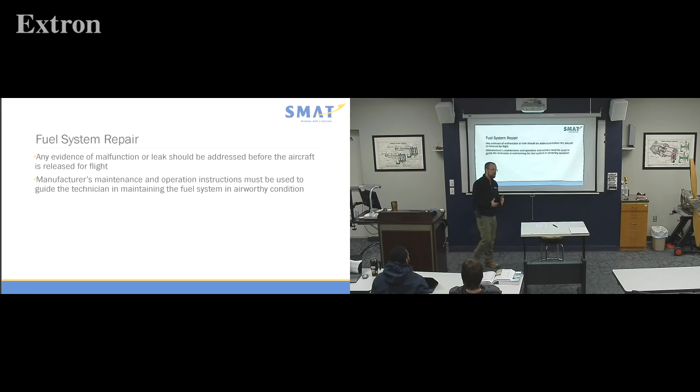All right, fuel system repair. Any evidence of malfunction or leak should be addressed before the aircraft is released for flight. There are some stipulations, and this is where the FAA asks several very ambiguous questions, so we'll look at those. Manufacturer's maintenance and operations instructions must be used to guide the technician in maintaining the fuel system in an airworthy condition. What do you do if you don't have a maintenance reference on the old 40s and 50s models for a fuel cap? What happens if there's nothing in AC 43?

A lot of times, Piper especially assumed that you already knew all these aircraft. And as I told you originally, how long were aircraft designed to last? 10 to 15 years. Well, congratulations, you've got a 75-year-old Apache out there sitting in our hangar. I mean, seriously. So now we've got to figure out, well, what does a fuel cap do? Well, it vents to the atmosphere. Does it work? There's not really a basic inspection method except for visual inspection. And sure, you could put a light amount of pressure in it to make sure that air is blowing through one side of it.

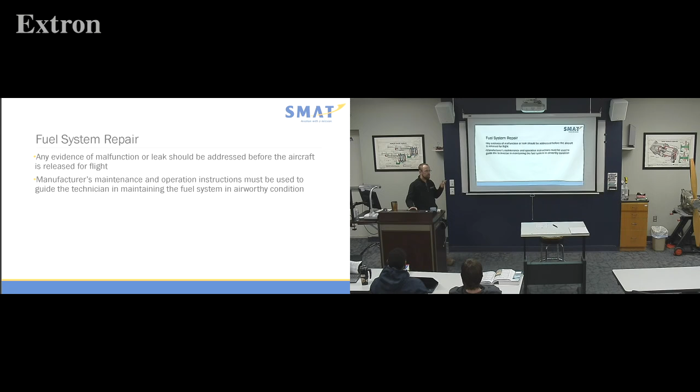Troubleshooting knowledge of the fuel system looks a lot like a schematic, but you understand what the fuel system is doing. If you were to look at this, it's kind of overwhelming a little bit. Where would you start with a system like this if you were looking at the big picture? Spider. Okay, so spiders, where are spiders typically going to be located? Well, they are located on top of the engine. Thankfully that is the standard. For both Continental and Lycoming, they're both on top of the engine.

What else do you see in this picture that seems familiar? Okay, you have fuel tanks. You have a selector, two selectors actually. Yep. Anything else that might seem big picture-ish? Okay, where's the gascolator?

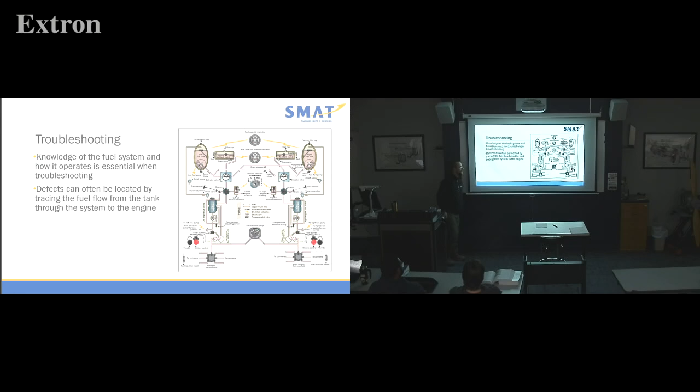I guess they're calling that. Nope, right here, strainer. Right here. Okay, there's a vapor separator on a Continental. What's the purpose of a vapor separator? Good job. For what reason? Prevent vapor lock. So they will send vapor back. Typically, they'll send it right back to the strainer, or sometimes they'll send it back to the top side of the pump. Okay, a vapor release, or back to the tank. Okay? Because vapor is flammable. All right?

So check connection point of fuel lines. So if fuel is continually leaking, what would we see? Slight blue residue. If it is a very mild leak, what color is it? Say what? Clear. It'll turn actually a slight greenish tint if it's a very small leak because it's having time to dry. Okay? If it's blue, it's typically a running seep or running leak where it's leaking just enough to keep it fresh and blue. But if it's a very mild leak, it's actually going to be a slight green residue because it has time to dry.

And fuel leaks, that's what I was saying, fuel leaks often produce a mark or a stain. Odors may point to the source of a leak. Zach, what does it smell like? Yesterday you found a leak. What does it smell like? Jet fuel. Okay? So point to it. If you open a panel and it smells like fuel, especially Piper, if you open the floor panel at the pilot's feet and you smell something, right beside the pilot is a fuel selector, notorious for leaking. Okay? Don't just dismiss it. Well, sure, it smelled like fuel, it's probably because of the fuel selector. No, if it smells like fuel, it's probably not sealed. Okay?

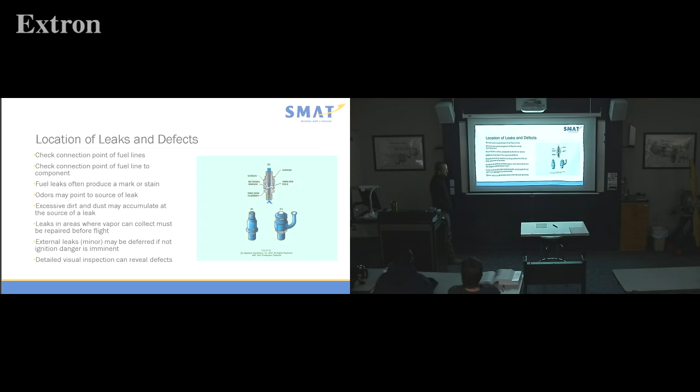Yeah, it makes everyone a little scared, especially 2,700 RPMs with 24 inches of boost. It'll kick it. It's pretty loud.

All right. So use the fuel system schematic to troubleshoot, just as you would electrical troubleshooting. To check if the fuel valve leaks internally, turn off the fuel valve. And then do what? Pull the gascolator bowl release, that little springy thing. And then if you still get fuel flowing to the gascolator, what does that mean about your fuel selector? It's not working. There's an internal leak inside of it.

And at that point, John, what would you do? You said it yesterday. Say it again today. You take the fuel selector out and inspect it. And change the O-rings or whatever. O-rings, okay? They're 80 cents a piece. If you have the fuel selector out, just change the stinking O-rings. Why would you charge $200 to crawl under the floor, pull the fuel selector out and inspect it, but not change the O-rings?

Would they be special order O-rings, or the ones you have in the cabin? That could be a problem, right? Okay, sure.

I don't think I've ever worked in a shop that didn't have fuel selector O-rings on. No, but can you use the normal, like, are they standard sizes, or would you have to get one specific? Yeah, I don't know the number off the top of my head, but I know it's an MS28775 dash, probably like a 010 or 011 or something like that. But are they typically in stock? Those are pretty common, yeah. Every shop would have those on the shelf, and they're super cheap. So go ahead and just change them if you have to pull the fuel selector, okay?

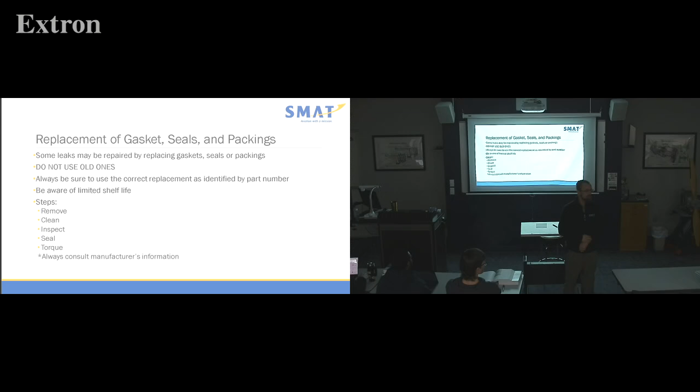Stoddard cleaner. Sometimes you can use alcohol, and if you're on the mission field and you don't have that, you can actually use fresh gasoline or avgas on a rag to clean it, and it will clean it right off. Put it on a rag. Don't dump the gasoline on top of the wing. Fresh gasoline will clean it off. And then come back over and wipe off all the residue.

Always repair fuel tanks in accordance with manufacturer's instructions. Rigid removable fuel tanks may be riveted, welded, or soldered, depending on design. Some of you, your welding skills, maybe not. Just kidding. I wouldn't necessarily weld a fuel tank. Pretty dangerous. Generally, repairs must match the construction technique. So if it was soldered, you have to solder it. If it was brazed, then you braze it, okay?

Some metal fuel tanks may be repaired by sloshing. This is kind of gone now, but like motorcycles, we love this. You take the chemical, you put the chemical in there, and you do what? What's so funny is it says for like 3 minutes. So, sloshing is still allowed on some of the older aircraft to be able to get all the areas sealed. Yes, sir?

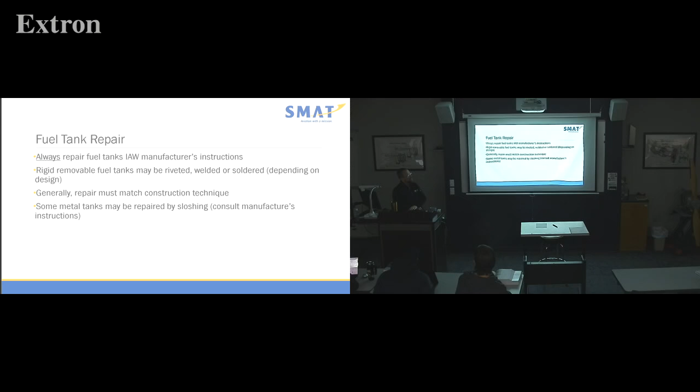Welded tanks. To locate fuel leaks, pressurize the tank to 0.5 to 3.5, depending on manufacturer's specifications. Brush and spray tank with soapy water and look for bubbles. Does that sound familiar? Dubby? Yeah. Clean tank interior and remove vapors before welding. Okay. The appropriate way: steam, hot water purge, inert gas purge.

Please, I've watched people hold a match over the top of the tank, and it gets really exciting for a minute until basically all the vapors have burned off. That's not a preferred method. It's exciting, but it's not preferred. To remove flux after welding in an aluminum tank, use a 5% solution of nitric or sulfuric acid.

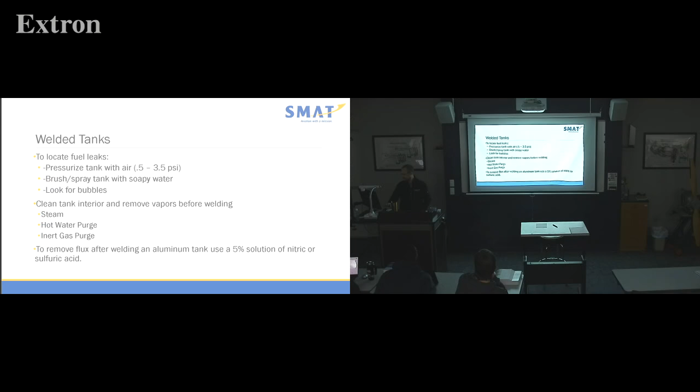And that is a written question. Here's the exact written question. What should be used to remove flux from an aluminum tank after welding repairs? 5% solution of nitric or sulfuric acid. Another one is, what is recommended practice for cleaning a fuel tank before welding? Steam. Steam. Okay. Here's a work of art from your book. Welding fuel tank.

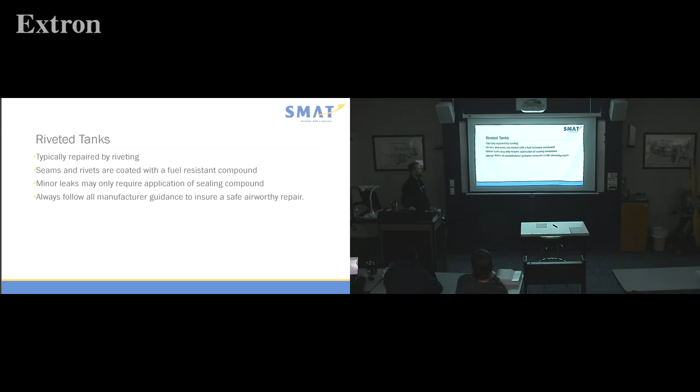Okay, riveted tanks. Seams and rivets are coated with a fuel-resistant compound. Oftentimes Pro-Seal or the knockoff Pro-Seal. But it's still flexible, so don't be alarmed by that. Yes, sir. Yep. Yep. Minor leaks may only require application of sealing compound, okay? But the problem is you got to get the sealing compound all the way off the old one to be able to get to the leak, okay? Always follow manufacturer's guidance to ensure safe airworthy repair.

Terneplate tanks assembled by soldering are typically repaired by soldering. Flux from soldering must be removed before return to service and follow manufacturer's instructions. What is terneplate? I'm glad you asked. Terneplate, or terne, is traditionally an alloy of lead and tin, typically in a ratio of 4 to 1, that is used as a coating in producing terneplate. In recent years, lead has been replaced with zinc and is used as a ratio of 50-50.

Okay, tin and zinc. Terne is used to coat steel sheets in order to produce a strong, corrosion-resistant product. It was used on roofing materials, packaging, and gasoline tanks.

Bladders may be repaired by patching. Okay, there are still some of the manuals, for example, with Apache and certain older aircraft that say you could take a patch. Now, if you put a tire patch on it, you will have the opportunity to do it again within just a few hours. Okay, tire patches really do not stick to the bladders very well at all. They weren't designed for it. A bladder patch is very, very sticky, and it will not come off very easily, and it's sealed pretty well. Okay.

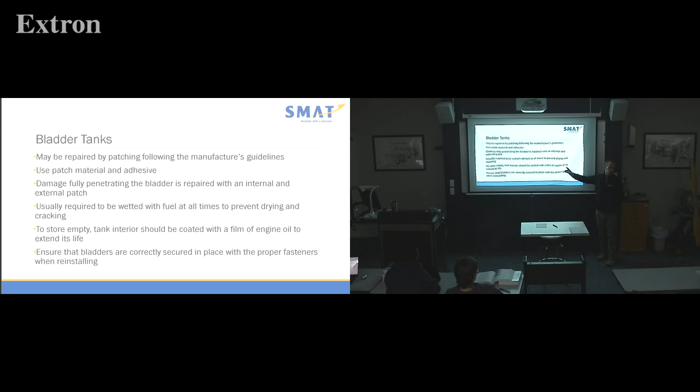Crack it. Okay? So if you're going to ship them overseas, missionaries, coat them with oil. Good coat of oil. Okay? And just placard it: it has preservative in the fuel tank. Okay? Ensure that the bladders are correctly secured in place, that you haven't broken any of the bolts. Yes, sir? When you go to use that bladder after you preserve it, how do you clean that up? Add gas. Yeah. A lot. You have to run it through several times. Yeah.

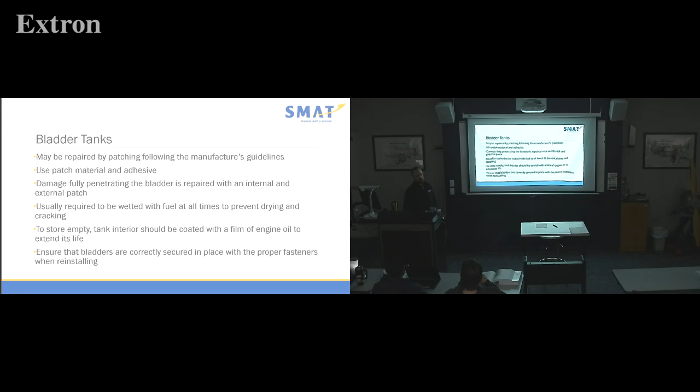All right. Repairing integral tanks. Purge with CO2, inert gas. Okay. And continue purging throughout the repair. Repair in a well-ventilated area, not in an air-conditioned building. Okay? It's funny. You kind of want it to be cool because you're wearing all this material, but you want to make sure it's ventilated.

All right, when entering the tank, large aircraft, position an assistant outside the tank for safety. Wear non-static clothing and wear a respirator with a continuous air supply. All right, written question. Which gas is used for purging of an aircraft fuel tank? CO2, carbon dioxide. And then what should be used?

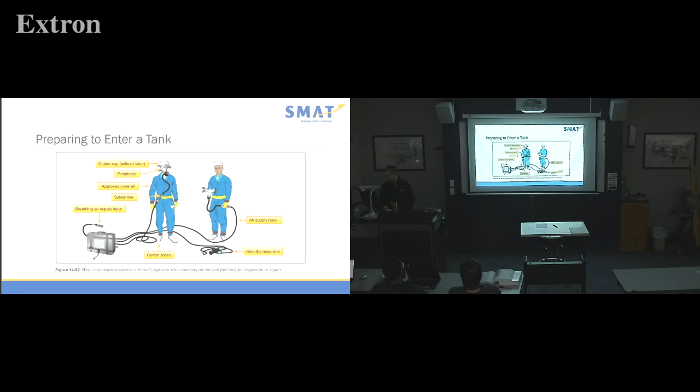What should be used on an integral fuel tank before attempting repairs? CO2. So a couple different ways it worded the question. Same thing, carbon dioxide or CO2. This is what it might look like if you went inside a fuel tank. Okay. Care must be exercised to guard against static electricity.

Yes, sir? Is CO2, because it's such a big volume, that has to be a lot cheaper than argon, or why CO2? Because doesn't CO2, carbon dioxide, push out oxygen, or the potential for oxygen to add to a flame if the flame was to occur? Is it heavier? So it's going to force oxygen out of the area. Is argon not heavy? I don't know. I think it is. But imagine argon with that much volume would be a lot more effective than CO2. It's funny.

So welders, we use the carbon dioxide on a MIG. We use pure argon on a TIG. Wonder why.

Okay, fire safety. Avgas, as you already know, is very volatile. Turbine engine fuel is less volatile, but still poses an enormous capacity to ignite. Treat all fuel as a potential fire hazard. Always have a fire extinguisher ready. CO2 is the preferred, no water. Okay. When you're doing a fuel tank, prefer to have it taped off, masked off, taped up, and then have your

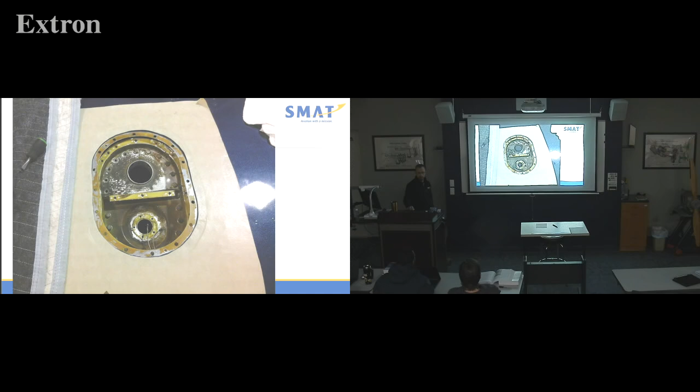Some of this brings back lovely memories for some of you already. Isaac, it's your favorite? Yep.

Okay, typical repair. What are they doing? When they have the top off, they're going to clean all this gunk off. Try to make it look brand new. There it is. Look at that. Going back in, new tanks. Okay, and then this will be you someday very soon. When you go to get tape, all those seams, that fabric tape, gotta get in there somehow, especially if you have tiny arms like mine. Dan's arms or Josh's arms, they don't even have to look in there, they just reach.

All right. So this is one that came out of Ludington. They were taking some passengers across to the Mayo Clinic. They got halfway across the lake. Engine began to pop. This is what's left. When the mechanic was investigated, they came back and said, "Hey, when you did the sump, what did you find?" They said, "Well, we found a little bit of trash at the sump, so we just kept purging it until it was completely clean at the sump." Okay, what about the gascolator? Well, there was some there too.

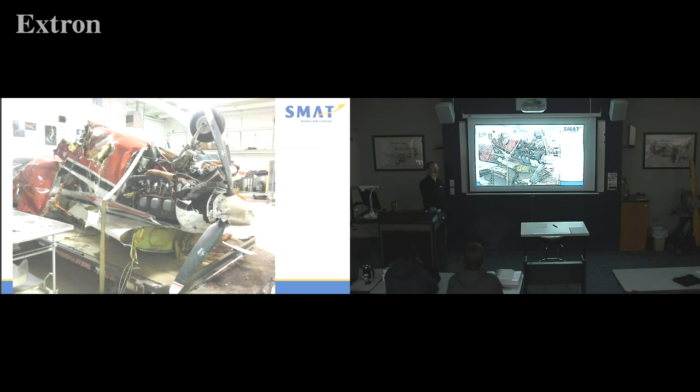Is there anything downstream of the gascolator? There is. There's a little tiny screen about that long on a fuel injector, on a fuel injected engine. On a carbureted engine, your last chance inside the back of the carburetor is a little bitty screen as well. And this is what they found. It's a screen, literally. You look at the size of the fingers here, and the screen is that big. So, if you find rubber or trash, investigate it.

When the FAA came to the mechanic and asked, "Hey, did you inspect the FCU screen?" The legal comment was, we've never done that in our shop. And it ended 3 people's lives. And that was just a couple years ago, okay? Midway over Lake Michigan, they realized that it was cutting out. And even with the boost pump, it could not force enough fuel into the engine. And so they ended up taking a dive 10 miles off the coast.

Okay, so these little bitty screens, they matter, okay? So FCU, fuel control unit, has a little screen. This is the one on the FCU. That's all it is. On a carburetor, it's a little screen on the inlet side. I want you all to be able to take one off, inspect it, and then put it back in. Before you do that, make sure the fuel selector is in the off position, okay? All right? And make it a regular practice. 50 hour, I'm going to pull that screen and I'm going to look at it.

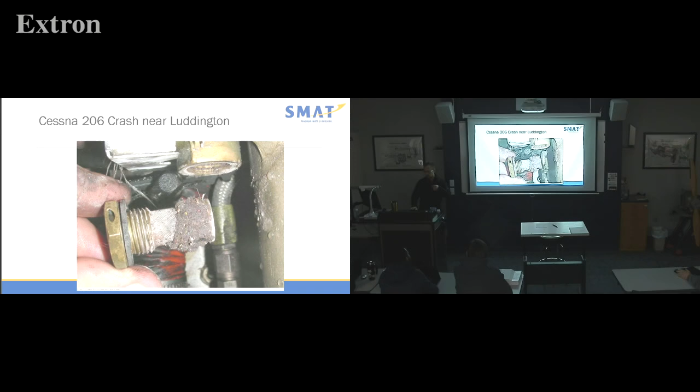Okay? All right, why don't you guys take about a 10-minute break? Why don't you come back at 5 till? 5 till. David, you take a nap till 5 till, okay? That's what I'm gonna do. I'll leave the lights off for you. You want a blanket too? I would love, no, just sleep in.

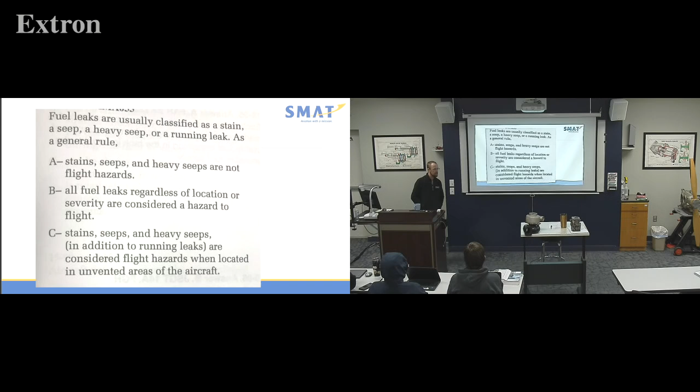C. Stains, seeps, and heavy seeps, in addition to running leaks, are considered flight hazards when located in unvented areas of the aircraft. In the cockpit, okay? It's a little tricky. I know. Sorry.

Parker. Fuel stains around a turbocharged or non-turbocharged fuel injection nozzle would indicate what? Told you there's something inside the fuel injector nozzle. What did I tell you was inside the fuel injector nozzle? A screen. So, A is correct. If it's showing stains around the top of it, then it's a clogged nozzle.

Okay, pressure's building right there. Okay. What did I do with my fuel injector? FCU. Fuel? That's not it. I see, yeah, A makes sense, but could also C be true as well? Yeah. Wouldn't a clog make too much fuel pressure? So what? Wouldn't a clog make too much fuel pressure? Good. It would, a clog is going to increase your fuel pressure on your manifold, not necessarily flow. Yeah, at your manifold. It would increase it. Right.

But if I set my pump at 30 instead of 25, more fuel is just going to return back to the fuel pump. The system's working right.

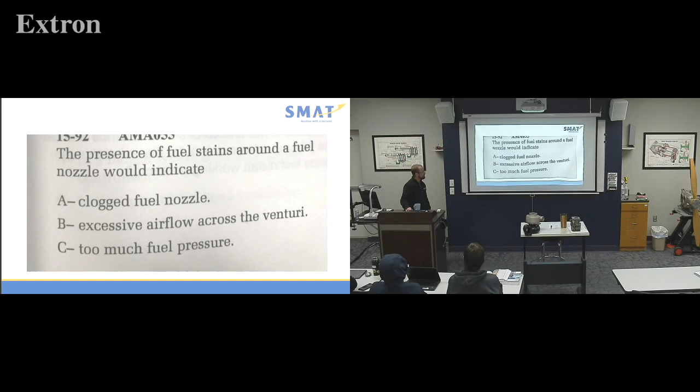Before fueling an aircraft by using the pressure fueling method, what important precautions should be observed? Sydney. What's the simplest answer here? Sorry, I've got to reread the question 5 times. You're totally fine. C is a good answer.

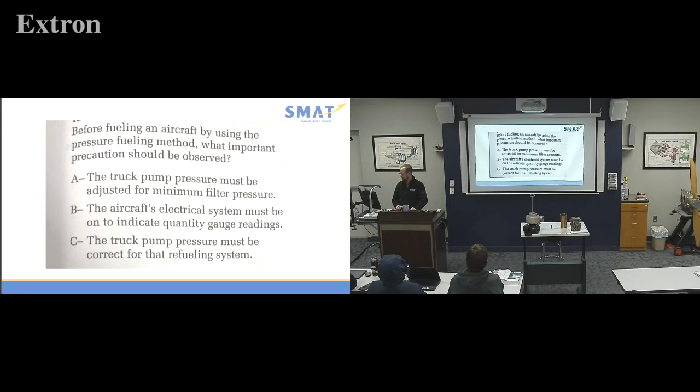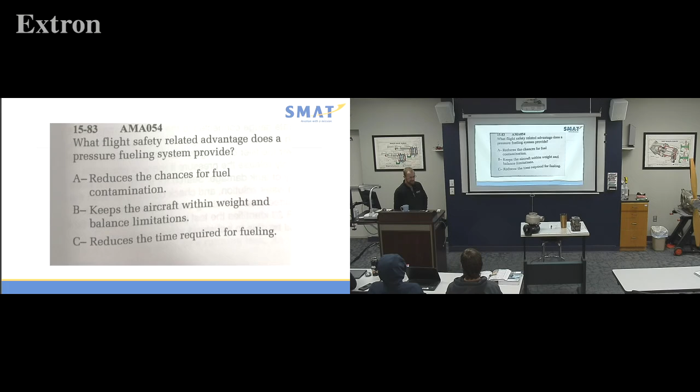All right. What flight safety related advantage does a pressure fueling system provide, Mr. Wilson? What flight safety related advantage does a pressure fueling system provide? Trying to get the logic here, so. There's only one that kind of makes sense. A. A. Most sense, I guess. John.

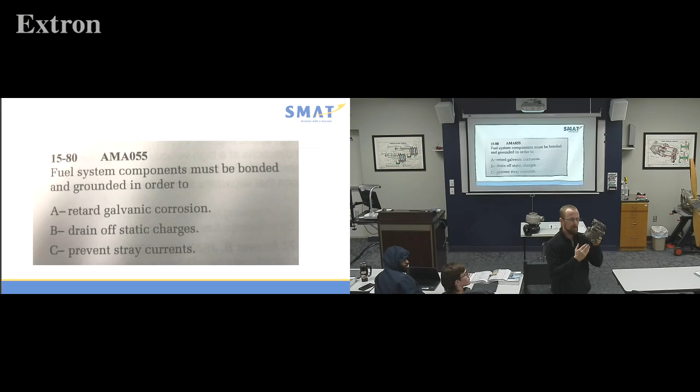So, how's a carburetor work? You've got a Venturi effect. The bottom is bigger than the top because it makes a narrow throat through it. So air is actually speeding up, increasing velocity, does what to the pressure? Decreases pressure. So we get condensation as it speeds up through here.

So in the event that dirt or contaminants get past the screen, they're going to clog those holes. And as it goes through, you have what we call impact pressure, which then causes fuel to get sucked up into the airstream. And dirt in that system would prevent that, and then the fuel couldn't actually get atomized with the air. Okay?

I'm going to hop through this lecture pretty quick if you guys are good with that. Everybody good with that? Take my timer, we'll go a little quick, okay?

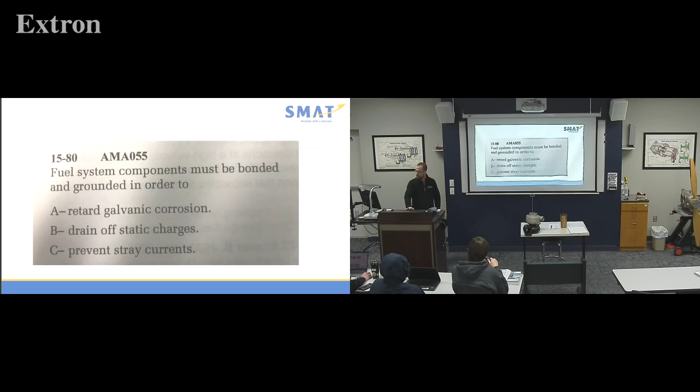So a fuel strainer has coarse wire mesh. It traps large pieces of debris. It does not inhibit the flow of water, so water could still get through it. But look at this 1 micron dust particle. When we're talking about a micron filter, it's supposed to stop anything that small. Fuel filters and fine mesh strainer filters are often used interchangeably. Micron filters are commonly used in turbine aircraft and capture extremely fine particles.

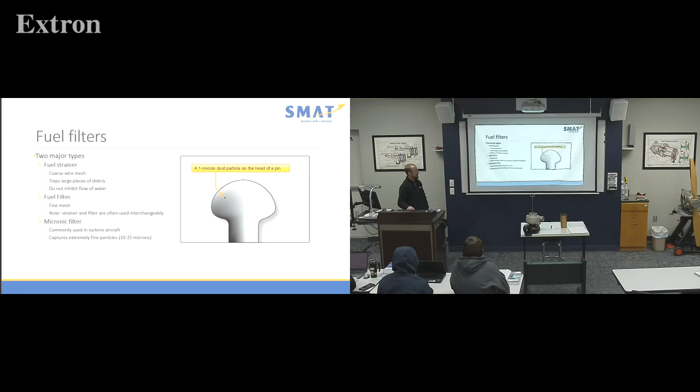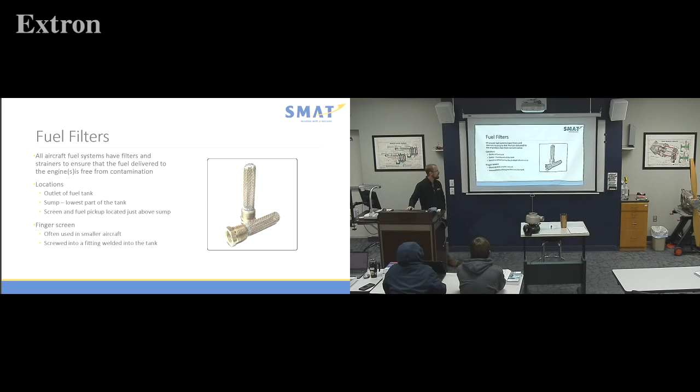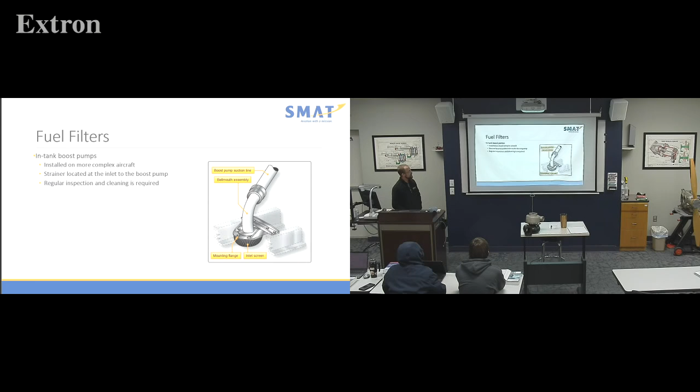All right, in-tank boost pumps. Sometimes you'll have a boost pump located in the tank, like on our King Air out there. Strainers are located at the inlet to the boost pump, and regular inspections and cleaning are required.

Main strainer. Anthony, does this bring back wonderful memories? What is this one off of? C85. So old school ones would be glass. Super cool. You walk up and could tell whether there was water in it or fuel. It was nice and blue. Problem with that is Michigan always wins. So when water would sit in the bottom of a glass bowl, what would happen? Ka-ching! We have several parts we pulled off our birds that endured the wretched winters. I love snow, if you don't know that already. Anyway, it's pretty common that they will get cracked.

What do you also notice about this one, Mr. Parker Miller? What is it missing? It's an obvious thing, so don't overthink it. Yes, I know fuel lines, but what else is it missing? Two things I'm looking for. Safety wire and a drain. You guys see a drain on it? There's no drain, and there's no safety wire. So what they have gone to now is a McFarlane aftermarket. A couple hundred dollars, you slap it on there. Looks just like the other ones.

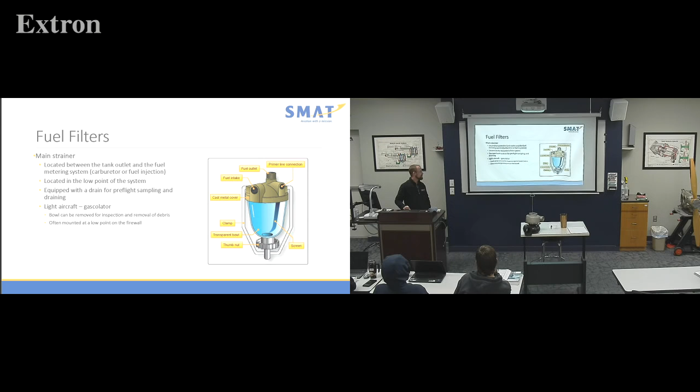Yep. So back home on our tractors, we had sediment bowls almost exactly like that. Occasionally my brother and I would get a little beefed up, reef it on there and crack them with that bottom screw nut. Is that a problem with those as well? Sure. But it's not a tractor, it shouldn't be tightened that tight. Yep. Yeah. Okay. All right.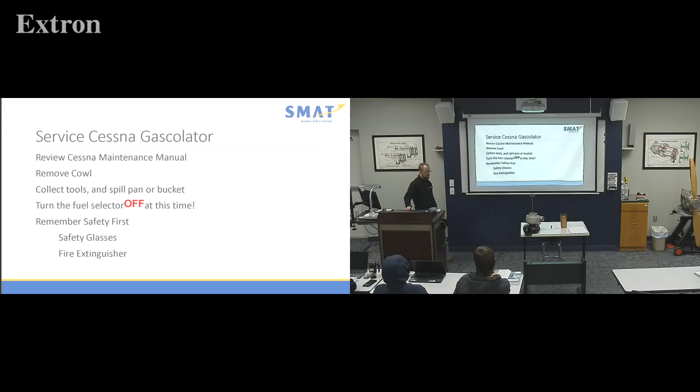Cessna gascolator or strainer. Review the Cessna maintenance manual. Remove cowl, collect tools, spill pans and buckets. Turn off the fuel selector. Turn off the fuel selector. And once again, turn off the fuel selector. Remember, safety first. Safety glasses and fire extinguisher. What type of fire extinguisher, Lee? CO2 would be a good one, yep. And always refer to the manual for torquing of the bowl.

Okay? You guys have probably been my best class thus far as far as removing the gascolators. In the past, they've gotten excited and removed the whole system, getting inside the cockpit, removing the bolts, pulling it off the firewall and saying, here it is. That's not inspection. That's destruction. Okay? So, just pull the one that usually means that's the part that's removed.

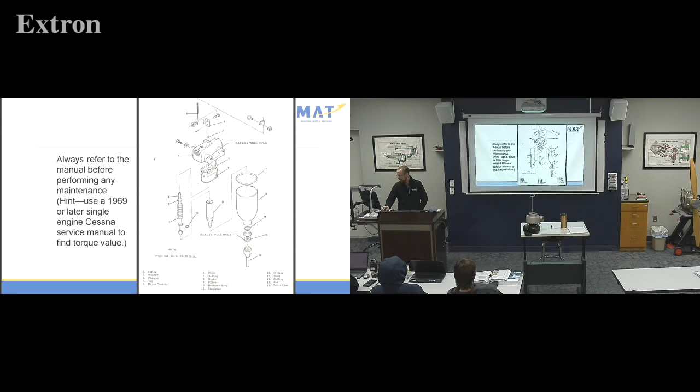So you would remove this, you would remove, what's this called? Standpipe, nailed it. And the filter screen, good. And you would inspect those, make sure they're clean, put it back on and torque it, okay? Everybody good there? Use a 1969 or later single-engine Cessna service manual to find the torque. Okay. We jump a couple pages here. You guys tell me what's wrong with this picture.

Didn't read the manual. All right, that bad boy should come down like this and go all the way around to the other side. Boom. Not straight down, because it's super convenient to go straight down. That's not right. Bring it down and around the bowl and put it to the other side. Okay? Because the manual says so. No, not torque wrench. Okay? But that's all they tell you. Assemble in reverse order. All right.

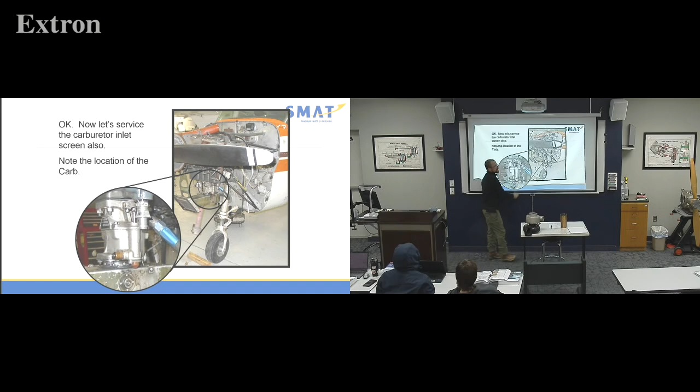So when you hook up, this is where your maintenance understanding has to come into play. From the gascolator goes to the carburetor. Okay, here's our carburetor. So the gascolator is going to be back here, and this is your main fuel inlet from the gascolator. So that's going to be where the screen is at. Okay. You'll need to pull it. Booyah, there it is. Okay?

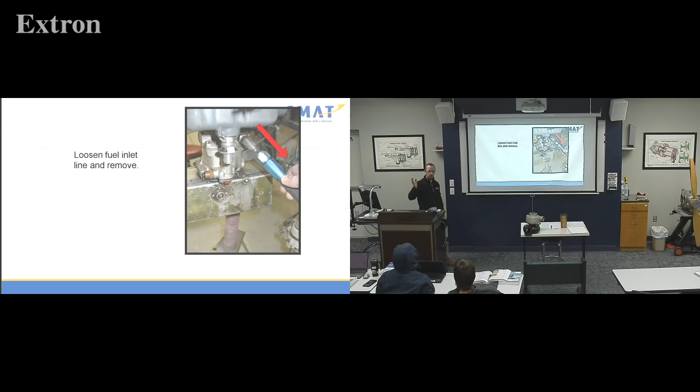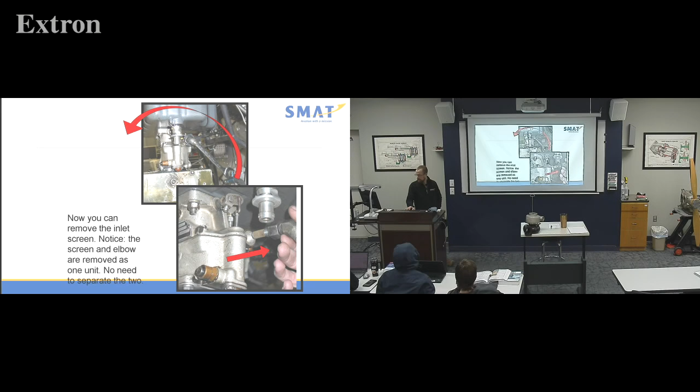Pull off the head. Once again, if I didn't say it already, make sure the fuel is where? Off. Thank you. Then turn it off. There is the screen. Now you can remove the inlet screen, and the screen and elbow are removed as one unit. No need to separate the two. Okay? So inspect it carefully, looking for problems. Putting it back in, there it goes, right there at the back of the carburetor.

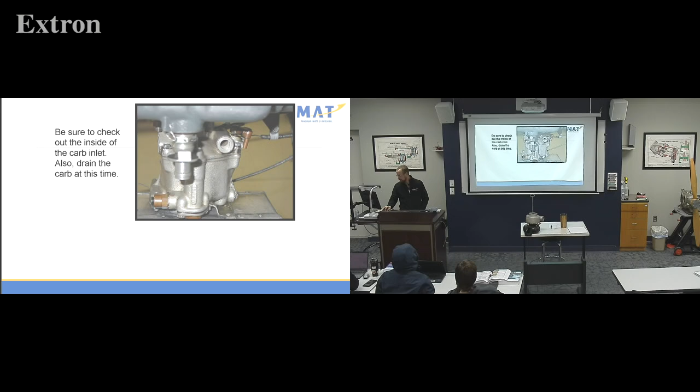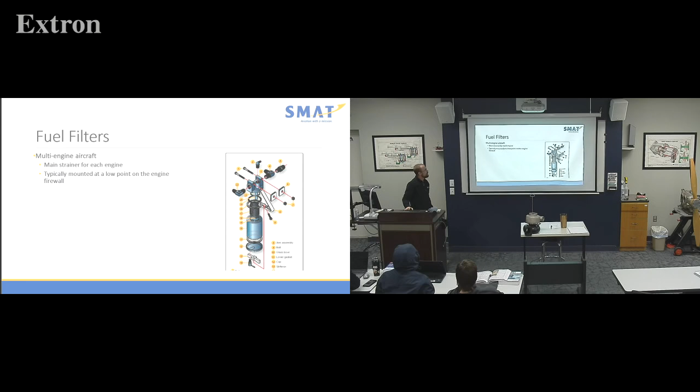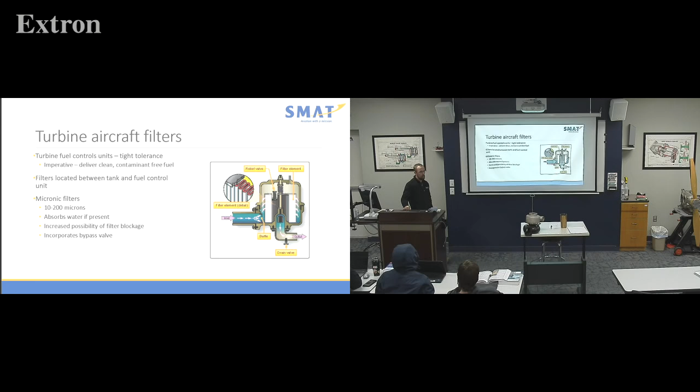Fuel filters, larger ones, have double fuel screen construction, cone shapes, and remove particles and water contaminants. Turbine fuel control units, tight tolerance. The goal is to deliver clean, contamination-free fuel. Located between the tank and the fuel control unit. And the big difference is they absorb water if present, but also incorporate a bypass valve in the event that it did clog. The engine would be able to keep running even though it would take in particles. Okay, additional filter located downstream of engine-driven pump.

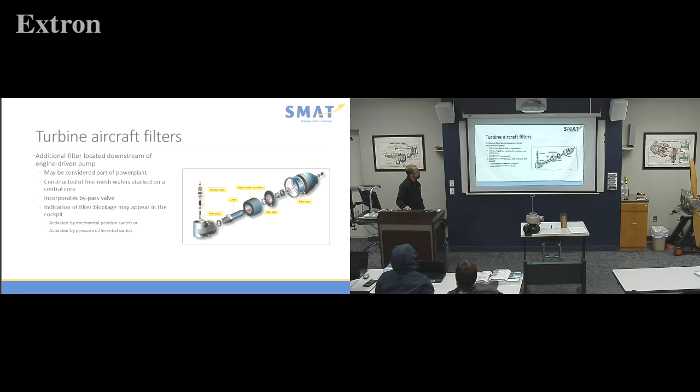All right, any questions? I talked about fuel heaters yesterday. I'm talking about it real quick here. Any questions about fuel filters, screens? Okay, operation at higher altitudes and colder temps increases the risk of ice formation. So fuel heaters are used to warm the fuel so ice does not form. Often operate intermittently as needed. Or sometimes they're connected to the oil system. Why is that?

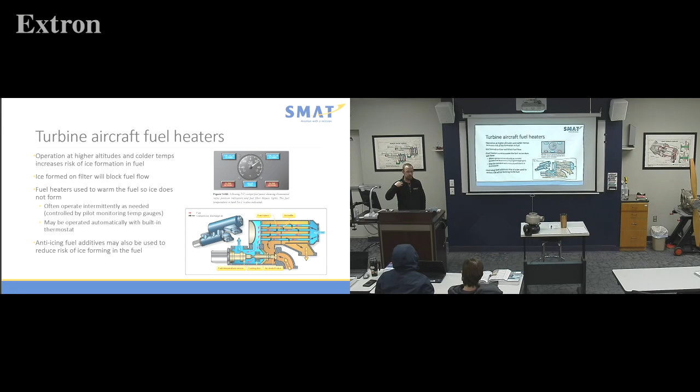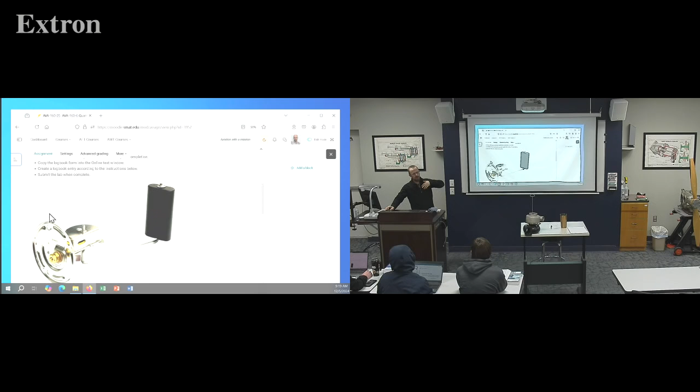You guys head out to the lab. I opened another lab. I'm going to open one right now for you. If you don't get this one done today, it's fine. Let me go over it real quick. Numero 6.2 says that you need to inspect a quantity indicator. How do you do that? Well, you hook your ohm meter right here, and then based on what type it is, it will read resistance from one end, either all the way empty or all the way full, and then you should see a steady change in resistance as you lift it or lower it.

Okay? So, it says, on an assigned aircraft, remove the fuel quantity transmitter. If your aircraft didn't have one, I have several, or you could remove them from the Apache as well. Then measure the resistance, and then write that down. Okay? If the manual doesn't list it, oftentimes it won't, then just let me know and I'll give you a reference point. If you've already done it, then just put in the details here.